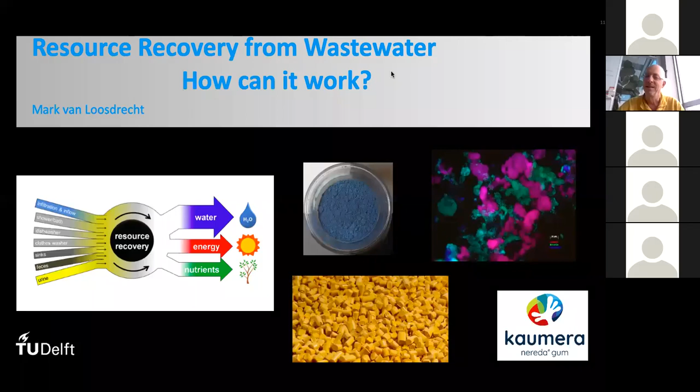Thank you, Bart. I will try to give a brief presentation with some ideas and my observations around water reuse and recycle and recovery. And maybe I can get the first slide. Yeah. So I will mainly focus on resource recovery from wastewater. That's my field. I can, in the discussion and in the question and answer session, try to comment on much more aspects. But the wastewater is the focus, and municipal wastewater in my case, because municipal wastewater is very general, and industrial wastewater, I have my opinions there, but that's each time depending on the local situation. Can I have the next slide?

If we talk about reuse and recycle, and we talk about municipal wastewater, we talk essentially about a few different categories of reuse and recycle. And the first one of that is water. That's of course the most obvious one. And in general, for water, we could say that technology is there, it can be used, it's even not that expensive compared to drinking water production as such.

But the use and the policies around it will very much depend on local water demand. So how much shortage is there in the drinking water supply? Is there agriculture around it? Are there industrial users which might benefit from clean water? And also reuse in nature restoration, etc.

The reuse and recycling for water is actually, in my view, quite well there. It is integrated in the primary processes of water utilities, but whether it's useful and how useful it is will always depend on the local water situation, and it's not a kind of one size fits all. The next slide.

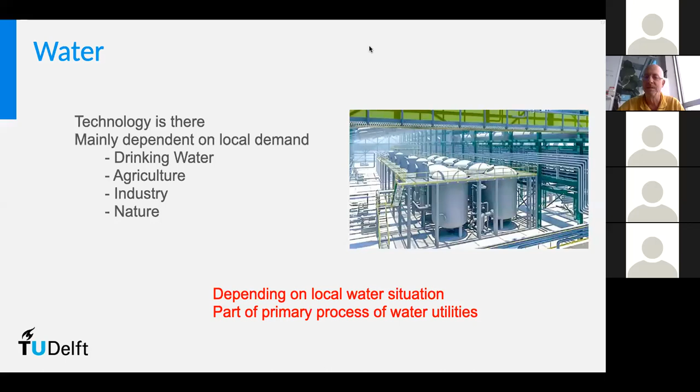So energy is probably the most discussed after water. Energy is the most discussed one for recovering of materials at a wastewater treatment plant. And here we have to conclude that the wastewater treatment plants very often can still save significant amounts of energy. And before we start to recycle and recover, it's maybe also good to have a good practice of saving and optimizing the energy at the treatment plant, and choosing treatment plants with lower energy consumption than maybe the conventional ones.

Also, from the operation point of view, it would be much more interesting to be energy autarkic, meaning don't have any contract with an energy supplier. Make sure that the biogas you produce, but maybe also solar cells, wind energy, make the plant autarkic, because that would be a significant cost saving. Whereas the energy itself is relatively low in value. So it is important, but it will hardly drive the cost. It's the line towards the electricity supplier which is the really expensive part.

And if we talk about energy reuse, the attention is very often going to reuse of biogas, but looking at wastewater treatment plants, it's the heat in the effluent which contains effectively much more energy than the COD in the wastewater itself. So attention for effluent heat usage could be increased if we want to be more circular. Next slide.

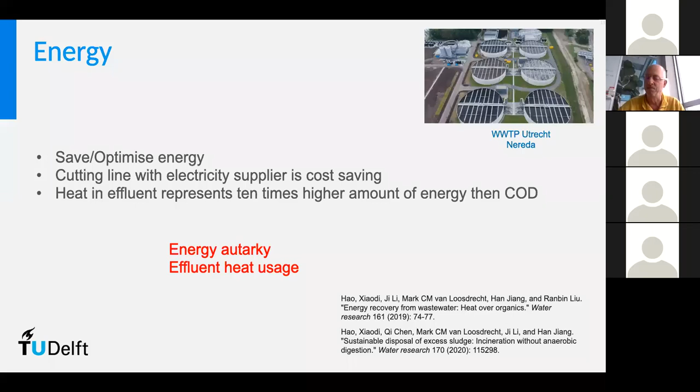Then nutrients. Nutrients are, of course, also a heavily discussed one and also implemented at certain places. Here the point is that the amount of nutrients in a wastewater treatment plant is quite significant, you could say, but on the total nutrient market, it's very limited. So it's very difficult to bring the nutrients back, because the share in the total nutrient market is small.

The other part is that until now, the nutrients have got attention, but very often in the first option, and that's very often struvite recovery. Whereas if you look to other minerals which could be recovered, like vivianite, it might be way more efficient, because with struvite you generally recover about 10 or 15% of the phosphate at the treatment plant. Vivianite allows maybe 60 to 80% recovery.

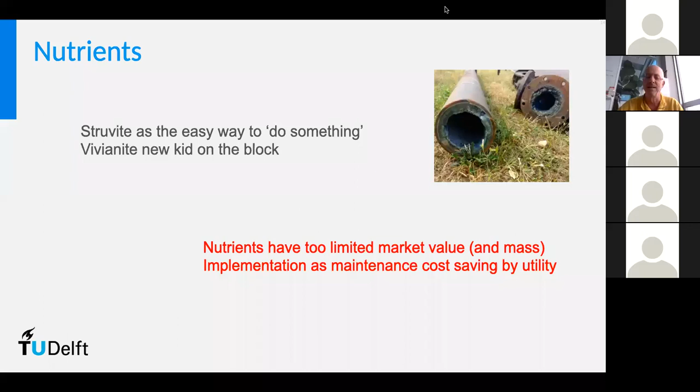Many utilities currently implement phosphate recovery, mainly driven by savings in maintenance cost or savings in sludge handling costs. So with internal drivers, still no external drivers to really go to a cycling of nutrients. Next slide.

So in chemicals, there's a range of developments. Partly that's recovery of cellulose, which is toilet paper, which is discharged at about 10 kilograms per person per year. That's a significant fraction of the total COD load. Easy to recover, but like for the nutrients, there's a very large cellulose market, and you come with very small amounts.

Other developments, especially in the Netherlands, are on the one hand making bioplastics in the form of PHA out of wastewater feasible, and developing into demonstration plants. And there's an option to recover the EPS matrix from especially Nereda granular sludge, or even from flocculent sludge. From granular sludge, it's called Kaumera. And that has nice gelling properties, but also good binding properties.

And here, the driving forces would be savings again in sludge handling, but also the potential of a commercial product. And the interesting thing with Kaumera is that already two loads of Kaumera have been shipped just on a commercial contract without direct subsidy on it. And this value of the product could potentially drive the recovery itself, instead of many other cases where the value of the product will not be sufficient to drive the recovery. And next slide.

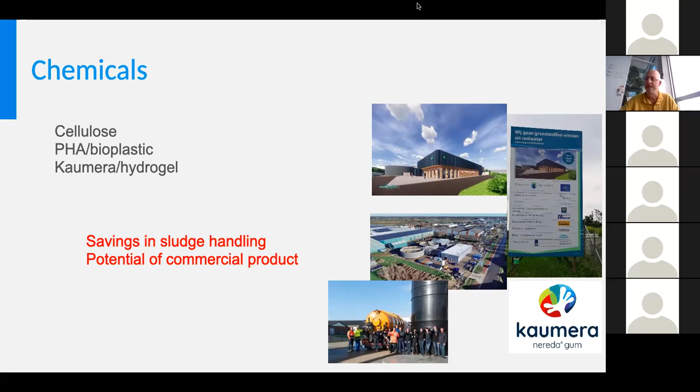So one of the major problems is there's a lot of technology that's developing. There's still very much space for developing new technology for recovery, new products to recover. So that's not the end there of creativity. But the real bottleneck is, if you want to recover certain chemicals which have value, to get that value out of these chemicals. And that needs a system change.

So in the production industry, usually there's one big mine that supplies all the raw resources, and then the centralized production facility to produce products which are then distributed to consumers. Well, actually that whole value chain is generally a private operation and is well organized. If you come with material from a wastewater treatment plant like Kaumera, the problem is there could potentially be already 300 sites in the Netherlands. So it's not one big mine, it's a lot of very small suppliers.

So you need to organize that, to collect that raw material, to make it into a defined raw material, then have a production and consumer products from the normal value chain. But the other system change which will be needed is that now the supplier is likely a public authority and not a private company, which gives all kinds of public-private interactions, which are not that well defined once you start to come into the details. And as usual, the devil is in the details when you want to develop this kind of value chain.

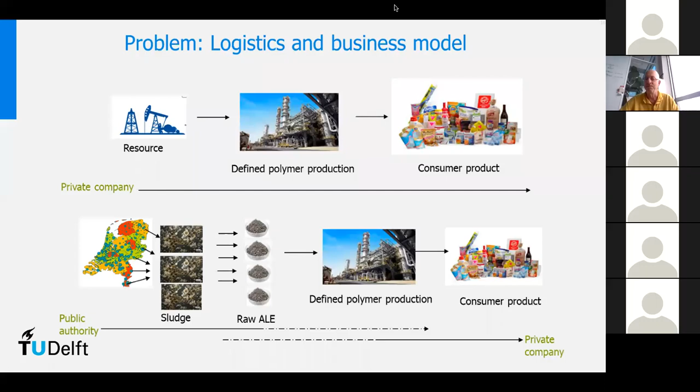Next slide. So summarizing, looking at reuse and recovery from municipal wastewater, but for a large part also from industrial wastewater and somehow from drinking water production. Water recovery, when needed, it's occurring, it's possible. There's not too many issues there, although there's always some legislation and policy.

Energy, in my view, the main thing is save as much energy as possible by doing your operation in a wise way and give more attention to effluent heat instead of to biogas. Nutrients is kind of nice to have. It is important to do it, but until now there's not a really strong market driver. EPS and potentially other chemicals have the potential to be economically so strong that they can drive their own production at the treatment plant. But what's essentially needed is more attention for the value chain and logistics of recovered material out of treatment plants in order to make reuse and recovery really a viable option.

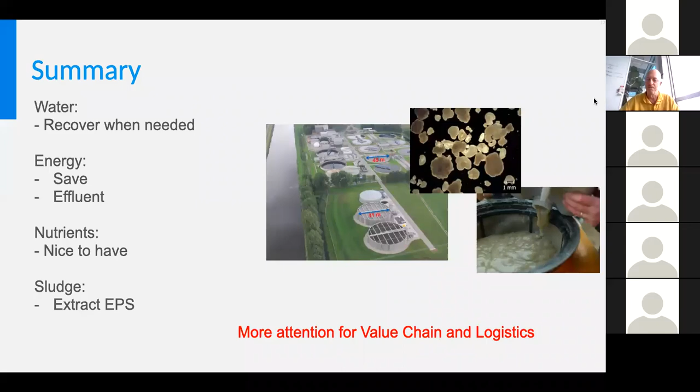And then with the last slide, I just want to point you to some literature which has recently been published by our group, where we also in a more general context try to look into the design of water resource recovery factories.

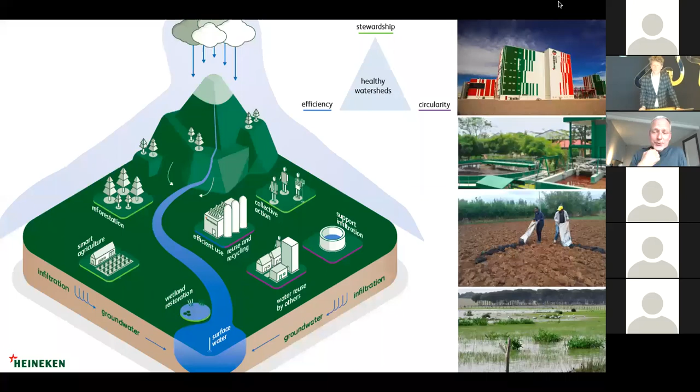Thanks, Jan Willem. I see some nice questions coming into the chat for you. Maybe you can have a look at them as well, because we cannot cover them all. But thanks for those questions. I'd like to go to Dimitris Xevgenos from Zero Brine. Dimitris, you're with us. Hi, Dimitris. I'm with you. I hope you can hear me. Okay. Yes. Thank you very much. Good to have you with us.

You've prepared some slides as well. My first question would be, what is Zero Brine exactly? We all know what Heineken is or does, but Zero Brine, please tell us about it. Yes, definitely. Let's start with the fact that Zero Brine is a Horizon 2020 project. Horizon 2020, as the audience may be familiar, is the 8th framework program from the European Commission. It started in 2014 and ended in 2020. And within those 7 years, there were in total 84 water-related projects.

So Zero Brine is one of those 84 water-related projects. From the start of Horizon 2020 towards the end, the European Commission was funding more and more circular economy water-related projects. In total, they invested 554, I'm taking a look at my notes, millions. And Zero Brine is one of these 84 projects with 10 million of a budget.

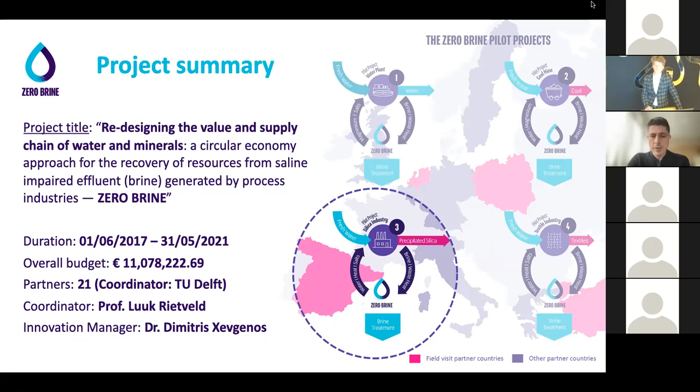I don't know if you have any other question about the project, or we can maybe describe a bit more the case of the precipitated silica.

Okay. Yes. Right. So it is not a surprise that most of those types of innovations are regulatory driven. So our end user there in Zaragoza in Spain, IQE, had a problem with the wastewater and with the local regulator, because they are anticipating a drastic increase in their market sales volume because of the phasing out of carbon black. So there is a rise of green tires, and precipitated silica is the main competitor to carbon black. And now they see a drastic increase in the product, but they cannot really grow. So there is a limitation to their business growth because of regulations.

The problem is that they are discharging a wastewater of around 20 grams per liter, mostly with sodium and sulfate inside. And the local regulator tells them, forget it, you're not going to get an expansion to that limit. So then the idea is that they need zero liquid discharge. And then the circular economy opportunity arises.

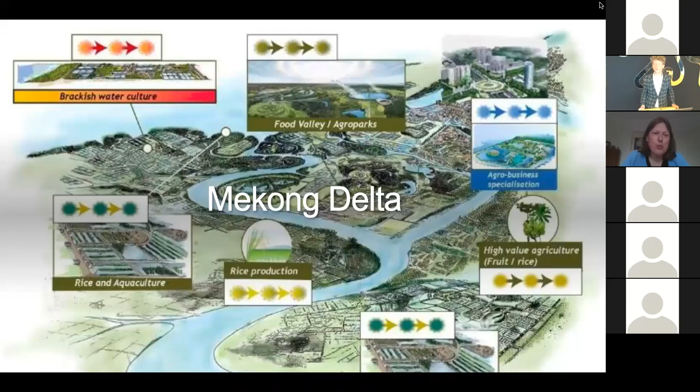Okay, thanks. And there's 2 minutes more if you want for some additional examples. Please go to the next slide.

I want to stress that also internationally, we try to do the same approach as we do in the Netherlands, so public-privately. So for example, Mexico has a lot of horticulture development areas at this moment, but they are dealing with a lot of challenges when it comes to the drain water from the greenhouses. So in the last 3 years, we set up a project with Mexico, with the government, with the horticulture companies to clean the water from the horti areas and to reuse it for the horti by using algae.

And this algae can be used again as feed for the chickens. So this is, I think, a great example of a circular approach where not only the water is cleaned and reused by the industry, but the algae that clean the water can be used for other purposes as well.

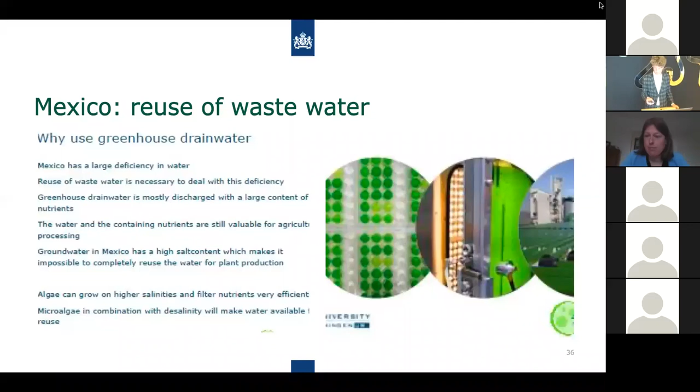Okay, if you want, maybe let's tackle one question instead of one of the projects. Is that okay with you? Yeah. What are the main techniques to manage the backwash stream from ultrafiltration processes, including the stream from the CEB and CIP cleanings? You can see it in the chat as well. It's a question by Everton for you.

Oh, that's a very technical question. If it's okay, I come back to the question in the chat because it's a bit too much detail. That's okay. Yeah, sorry. No, that's okay. I'd like to leave it at this for the moment, Willemien. Thanks very much for highlighting the mission-driven policy and the international projects you're working on. Thanks a lot. You're welcome.

Going towards the third part, safe resource recovery and the European Union perspective. For that first part, I'd like to invite Nienke Hofstra on the online stage. She is associate professor at the Wageningen University, the main agriculture university in the Netherlands. And she will talk about how wastewater reuse can be a serious health risk.

Hi, Nienke. Hello, I'm here. I cannot switch on my camera, so I hope somebody else can do that for me. Okay, there we go. Yes, there you are. Hi. Thank you.

I shortly introduced you, but I'm really curious to know what are the main health risks if we want to reuse water. Yeah, I think health risks are indeed important to take into account when we look at all of the processes that people have been discussing already. And if we go to my slide, you can see that I put there as main contaminants the pathogens and the chemicals. And I also think that antimicrobial resistant bacteria and genes are important to think about when you talk about health risks. And users of the water, but also of the produce produced from the wastewater, can face health risks.

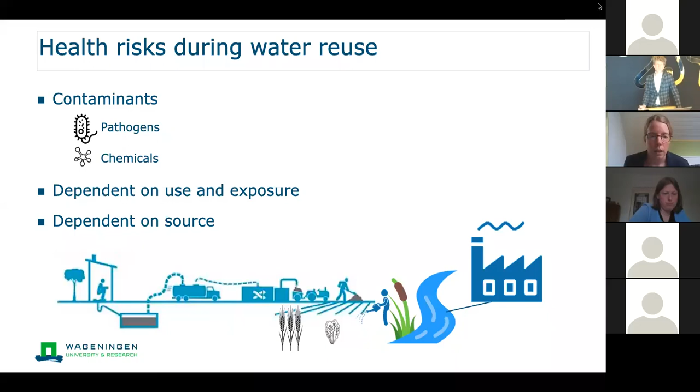And I think you can make those decisions on the barriers by thinking about safety plans. An example of these plans are sanitation safety plans, where reuse is actually also included. These sanitation safety plans proposed by the World Health Organization really help to identify what barriers are required. So these safety plans look at the sanitation system in this case, and for reuse it would be the reuse system. They look at the health risks that are related to the exposure to the water or to the produce,

and then plans are developed to improve the situation, and within the WHO they have focused on incremental improvement plans, because while technology is available throughout the world, implementation is not always possible in many parts of the world. So Heineken, of course, is able to do these things, and there are other organizations through which it's very well possible. But in many parts of the world, it's not possible because it's too costly. There is not enough knowledge on building barriers or maybe on maintaining them. But also there is a lack of awareness, as you mentioned earlier.